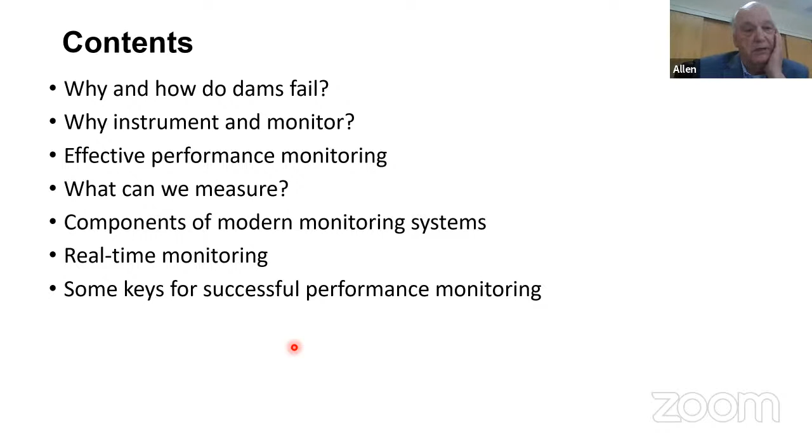Historically, with a lot of water-type dams, we tended to drift into monitoring once a quarter. In my view, in today's world, that's not adequate. I'll review some keys for successful performance monitoring based on the experience of myself and my colleagues. I will skip a few slides here—I know this is going to be shared with some students, so I left a few slides in to elaborate on some topics.

So we don't have time to cover all those, so I'll skip a few as we go along. I want to start with a question: are we doing things the right way, considering that dams have failed and continue to fail? Just a few perspective statistics here.

A modern water storage dam historically is shown to have an annual failure rate of about 1 in 10,000 over its life, or half of those occur during first filling, so about 0.5 times 10 to the -4 after successful first filling. That comes from my colleague Greg Baecher and colleagues. That number has been challenged many times since 1981, but it seems to still stand up. Some work I did a couple of years ago also seems to be confirmed by others, that tailings dams have an average failure rate of about 10 times this value.

Now that's a rough number. The key point is that it is significantly higher than for modern engineered earthen dams for water storage purposes. If you simply ask what this means: considering that a dam might be expected to last on average about 100 years in today's world, then the chance an average modern dam might fail during its lifetime, if it survives first filling, becomes about 0.5%, or 1 in 200.

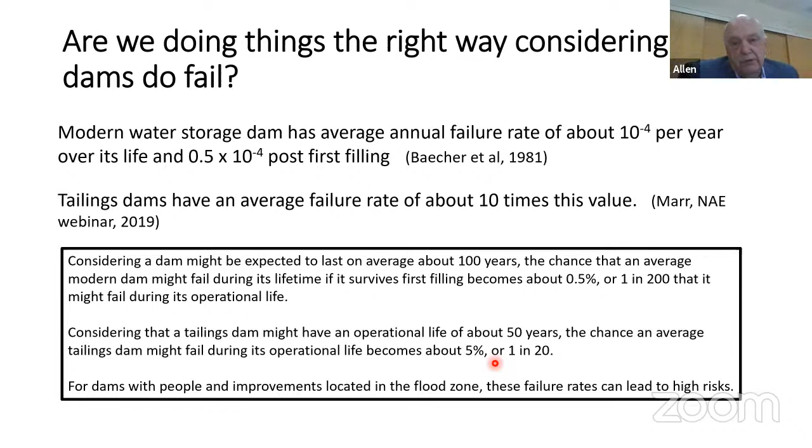Considering that a tailings dam might have an operational life of about 50 years before going into closure and hopefully a safer mode, the chance an average tailings dam might fail during its operational life becomes about 5%, or 1 in 20. When you take these probabilities and combine them with potential consequences of a failure—to people and improvements downstream—these failure rates can lead to quite high risks to society for certain dams in certain locations. A dam in a remote location with low consequences may not be as concerning to us as something above a city.

Just to review a few recent failures to see what we can get out of those.

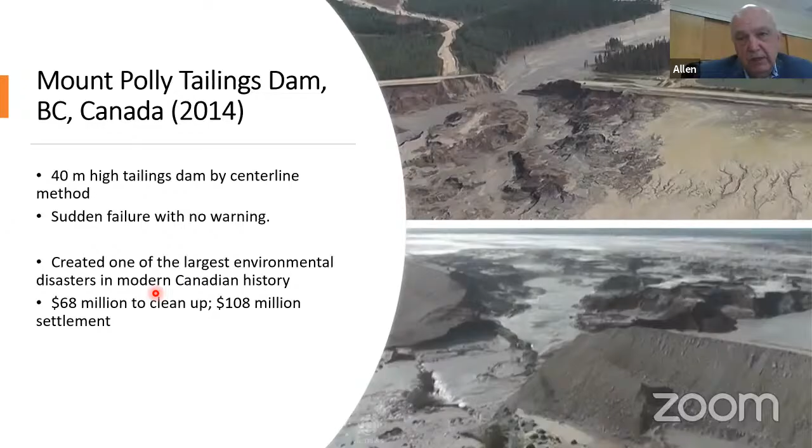There was a major failure a few years ago in Canada, a 40 meter high tailings dam built by the centerline method, a sudden failure with no warning. There was some instrumentation in this dam, but not very much. Its consequence is that it created one of the largest environmental disasters in modern Canadian history. So while this was a waste dam, which might not be considered very important, it in fact was in its consequence. It cost quite a bit of money to clean up, and there was a big lawsuit, including engineers being charged for negligence. And it changed Canadian dam safety laws to a whole new set of requirements for safety of tailings dams in Canada, which is setting the pace for the rest of the world too.

That particular case was looked at by some famous engineers, including Dr. Morgenstern, who determined that the cause of failure was a failure through a weak foundation clay that became normally consolidated under the full added height of the tailings. That brought it to normally consolidated shear strength, and as a result, by continuing to add material, it experienced an undrained failure. This failure mode was not anticipated because the engineers who designed it never anticipated it becoming normally consolidated material.

There was instrumentation. There were piezometers installed, but they were of the type unable to measure undrained pore pressures induced by shearing during the last stage of loading. A common problem we see with instrumentation - it's there, but it doesn't detect the warning signs that are really meaningful to us.

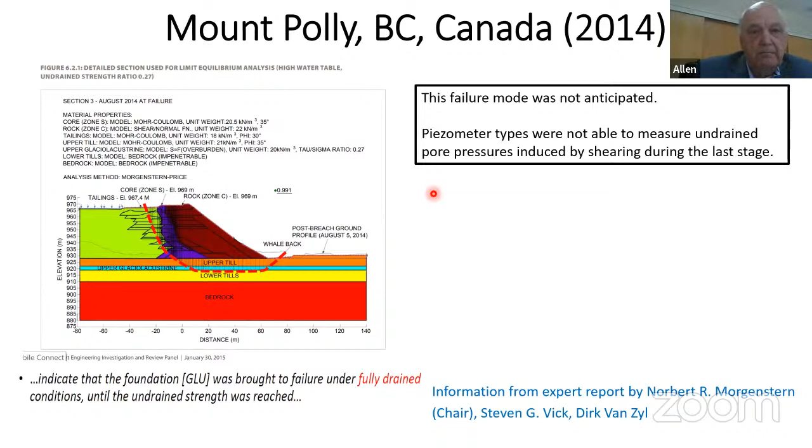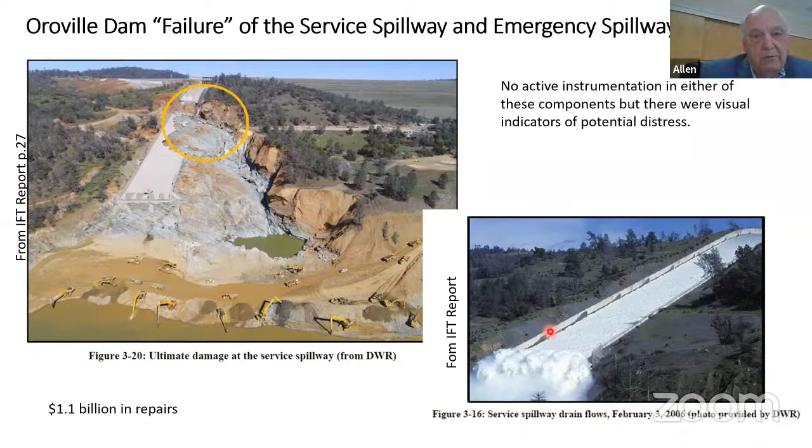There was another one, Kingston, which is a fly ash storage facility in Tennessee for one of our clients, and this was a sudden failure that was the result of an undrained shear along a previously unknown thin seam of muck - that's this zone down here across the bottom. It was basically a slimy-like material. They were filling and adding to this cell at a fairly rapid rate, and it suddenly generated an undrained failure, which then triggered a flow slide of the sluiced ash, which is a hydraulically placed material at very low density, and therefore prone to static liquefaction.

There was instrumentation, actually quite a bit of it in this facility, but none of it was designed to reveal behavior of this critical zone, since that zone was not known to exist. This could probably have been detected with real-time inclinometers had they been placed in the right place, but that required somebody to anticipate that failure mode, which had not happened.

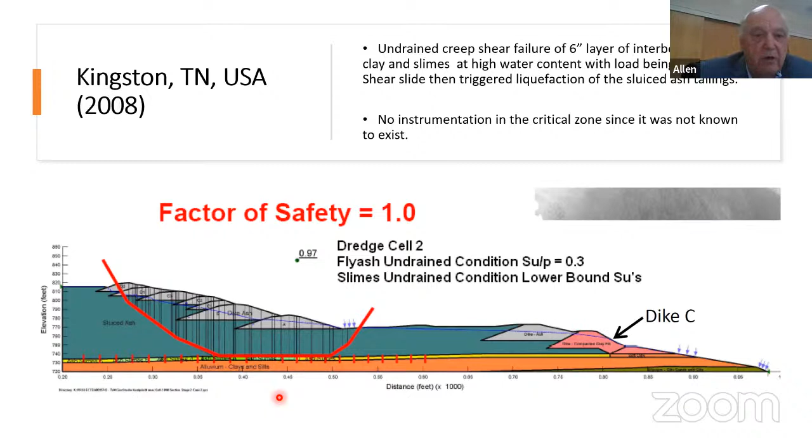My comments here are not a critique of anyone, it's just a reporting of observations and facts and what we can learn from those. Here in the United States, we had a recent failure. This is significant in that it greatly changed regulation of these types of waste storage facilities in the United States, causing our Environmental Protection Agency to get much more proactive in regulating their design. Owners today of these facilities are spending a lot of money to upgrade the safety of these facilities.

Recent failure of a water storage dam, only about 32 feet tall. There was quite a bit of damage downstream, a loss of the structure, which was part of a hydro scheme. And what's really significant about this is that the latest independent report suggests that this was a static liquefaction failure, which is very rare in an earth-filled dam used for water storage purposes. But there's no known instrumentation in this dam for performance monitoring - an interesting question of whether there should have been.

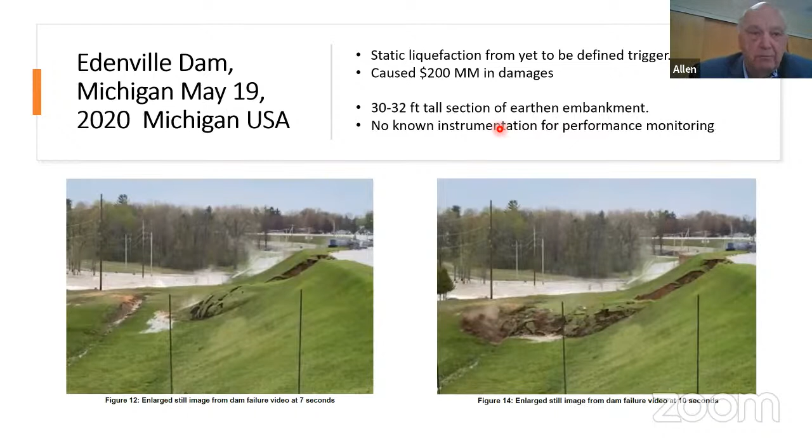Switching from these failures to show that failures occur and many times we don't pick up any information from the instrumentation because it wasn't properly designed or didn't exist in the first place, and many times isn't interpreted properly. Let's look at failures a little bit more.

Looked at from another way, that same database has been put together more from a mechanistic or driver-of-the-incident perspective. It's quite interesting to see that by far the largest cause is hydrologic flooding events, followed by seepage and internal erosion, then unknown factors and deteriorating conditions. Again, structural stability, which we worry a lot about as geotechnical engineers, is a fairly low issue here.

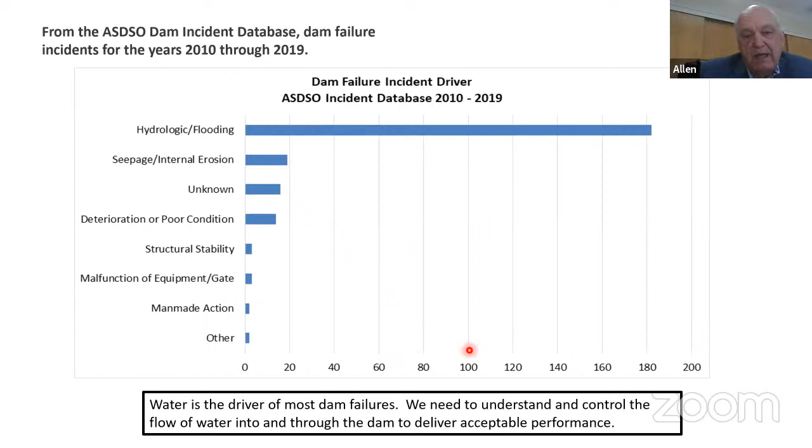We need, when we're talking about instrumentation and monitoring, to really keep these kinds of things in mind. A big message out of this is that water is really the driver of most dam failures. Now, that may seem like a stupid comment—it's obvious, it's a dam, it holds water—but it means we really need to understand and control how water gets into the dam and flows through it, and how we make it deliver acceptable performance under all imaginable conditions.

Looking for a moment at tailings dams, there's a nice paper summarizing worldwide history on causes of failure, and we see something different than what we saw in water retention dams. Here we have a lot more geotechnical type failures: seepage, foundation failure, earthquakes, and others involving geotechnical reasons as well. Overtopping is much less of an issue, and those of you who work in tailings dams will understand that—we don't have a big rainfall collection basin feeding water into our reservoir. We just don't have that driver present in most tailings dams. But this means we need to think differently about how we might instrument and monitor tailings dams compared to water retention dams, because the predominant failure mechanisms are different.

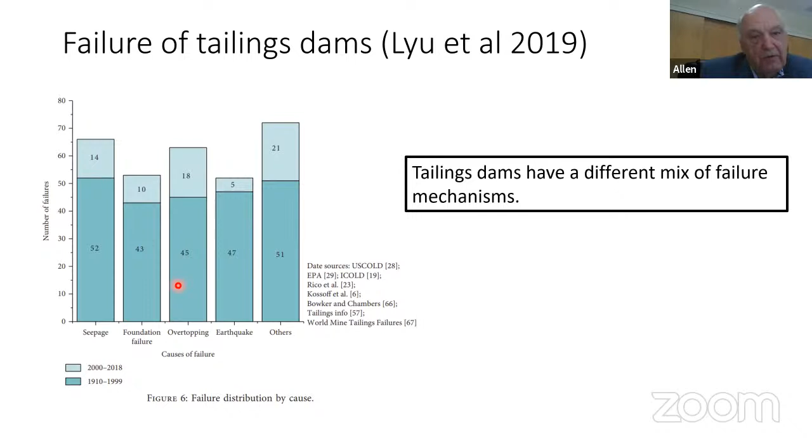So looking a bit at why we instrument and monitor dams, it really is to help us answer important questions. Some of you may know the famous early instrumentation figure John Dunnicliff, who wrote the only real book on geotechnical instrumentation and monitoring in 1993. John died recently, unfortunately, but I'd like to acknowledge his great contributions to our field. He had a statement that for instrumentation, you really need to have a question—instrumentation is to help answer important questions. If you don't have an important question, you don't need to instrument and monitor. Keep that in mind, because many people lose sight of that fundamental purpose.

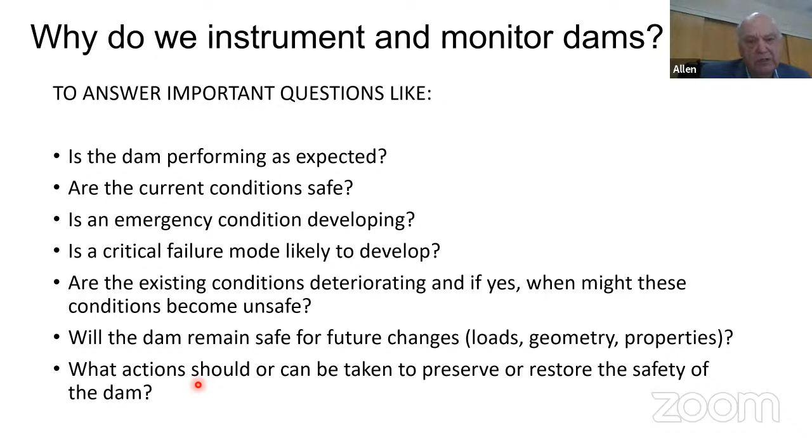So we have questions like: Is the dam performing as expected? Are the current conditions safe ones? Is an emergency condition developing? Is a critical failure mode likely to develop in the near future? These are similar questions in ways, just asked differently to get people to think outside their normal modes. Will the dam remain safe in the future? And what action should or can we take to preserve or restore the safety of the dam? These are important questions, and if we can use instrumentation to help us get substantive answers to them, then it has real value.

I want to talk a moment about failure, because traditionally we as dam engineers have tended to think of failure as loss of containment. That comes out of the water retention world, where once we started to lose containment, the dam was almost assured to completely fail and flood downstream. But in today's world, we really need to broaden that, because dams are of different types, serve different functions, and the demands of society are much more today than just simply avoiding failure. So I've added that collapse or loss of containment is a low probability but high consequence event.

But we can add increasingly a concern about resilience. Can the facility remain operational after a major storm brought on by global warming, for example? In this case, it can't be restored to perform its intended function. How can instrumentation help us on a facility that's been damaged to tell us, yes, we can reuse it, or no, we can't? It requires major rework.

And then loss of serviceability. Increasingly, it's important that our assets after an event be operational, remain operational. They've got to be able to continue to perform their intended function, or maybe they deteriorate over time to the point that they can no longer service that function and we have to take them out of operation. These are higher probability events with lower consequences, but high probability times lower consequence may still be a very significant risk, almost in similar magnitude as the above loss of containment, low probability, high consequences.

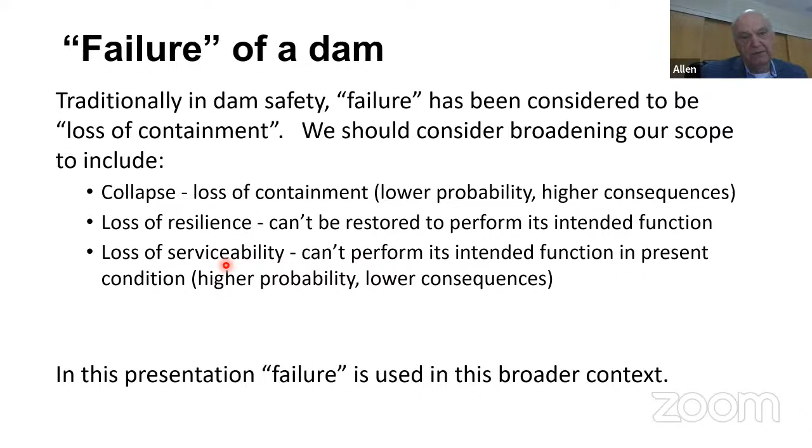So we really need to broaden our view when we're talking about monitoring a dam to help preserve safety, to help manage risk, to look at these different measures of failure to perform. I'm going to use failure in the rest of this presentation in this broader context, not only of collapse, but of loss of function. So just a few thoughts about performance monitoring.

It's done to indicate unexpected performance before the consequences become large and costly, hopefully so we can intervene and change those consequences or avoid those consequences. In order for it to work, it tells us when we implement a contingency measure to help us reduce those unexpected consequences. And it helps us spot emerging risks early so we can apply risk mitigation measures efficiently.

Increasingly, dam owners are making use of risk registers and risk assessment and risk management techniques and technologies. And I think monitoring provides some key data to enter into those risk management strategies. That's an emerging concept I've talked about for 10 years now, and it's being adopted by more and more folks. Managing risk saves money. So this really is telling us that a good instrumentation monitoring program ultimately saves an owner money through managing risk, lowering risk.

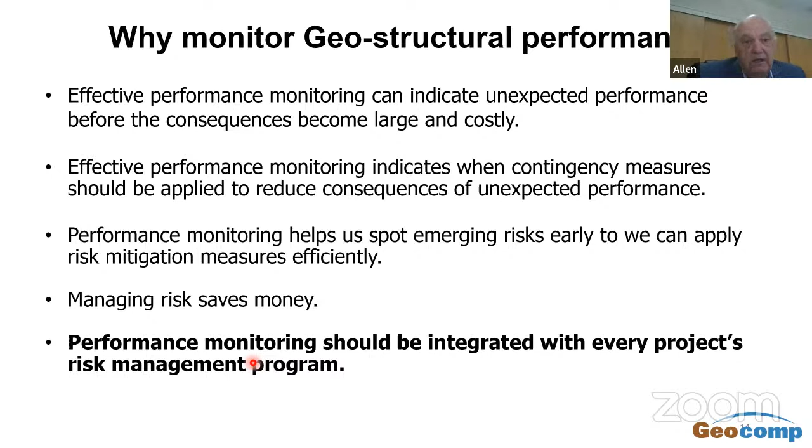And so as a result, I conclude that performance monitoring should be integrated with every project's risk management program. I don't see it done that way that often, but it really should go together with risk management.

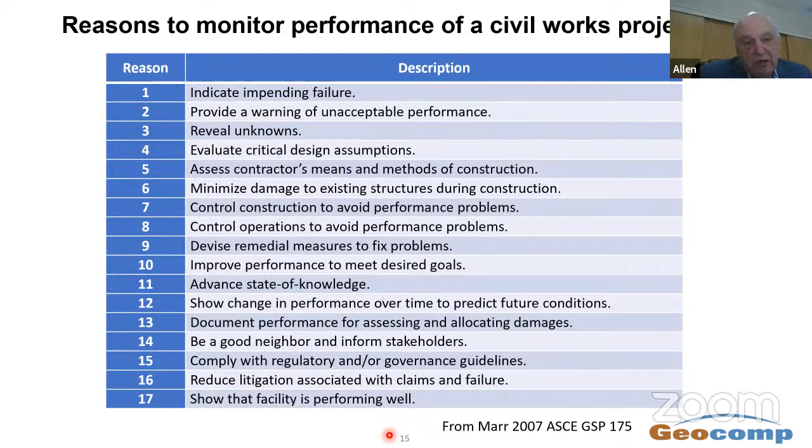There's all kinds of reasons to monitor performance of civil works. I won't go through all these. I wrote about this. If you can't get this particular publication, feel free to contact me by email. I'll be happy to send you a copy of it. But it describes these various means and reasons for why, and if we're going to go ask for a budget for instrumentation monitoring, we need to really have a good justification. That's one of the reasons I tried to write on these, to help you formulate reasons, rationale for getting approval of funds to do a good performance monitoring program.

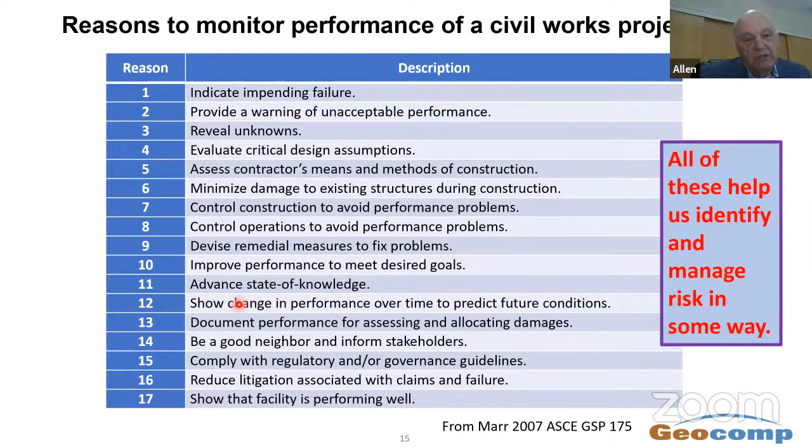These are all various reasons. I won't go through them. But if you think about them, you go back to their root, they really are all aimed at helping us identifying, managing risk in some way. And so risk and risk management is at the heart of dam safety, and it's a key driver for why we should instrument and monitor.

This is a busy slide, but I just focus on the key message of this slide. I put together, going back to this number that we had of a dam we had at the beginning of the presentation, a dam that's well engineered in the modern world has an annual probability of failure of about 0.5 times 10 to the minus 4. But how might monitoring help us lower that? Suppose we have a huge population downstream or a nuclear power plant downstream. This might be too high of a probability.

And so I worked out what's called an event tree to trace out how things might develop and how interventions might change probabilities. I won't go into these details, but the point is, if I instrument and it's successful in detecting poor performance and I implement my corrective actions properly, then I can lower, in this example, my probability of failure by roughly 10-fold. And depending on how you work with these probabilities, you can prove that a good monitoring program can reduce risk by 10 to 100 times. And that can be very, very cost effective.

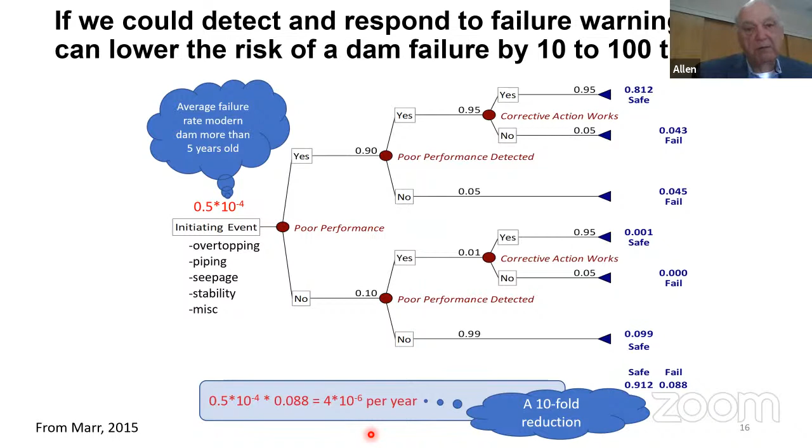I urge some of you who are challenged by how to justify spending money on instrumentation and monitoring, think of it in kind of the context of this event tree and put the numbers together to help show management that there is a good basis, good money basis, financial basis for doing good performance monitoring.

Now, I keep talking about good performance monitoring or effective performance monitoring. What do I mean by that? I mean that we've got to collect and use observations and measurements to quantify how a structure is performing its intended geostructural function. It's not just taking data and making a nice plot and a pretty color chart report. It's doing something to help understand how that structure is performing, to help answer questions like, is it meeting its design requirements? Will it continue to function?

Will there be a time when it won't function? And what can be done to improve performance?

Many times we'll go and say, well, this dam looks like it's not working right, so let's spend $10 million doing this. It's kind of like a Band-Aid thing. Well, with instruments, we can get a much better idea of why it's not performing right, so we can target that remediation work to the real root cause of the problem.

And effective, what does effective mean? It's producing a desired outcome or end result. So effective performance monitoring is really obtaining and using data and observations to help ensure the facility will perform its intended function, that other facilities are not damaged, and that impacts to the neighborhood are minimized.

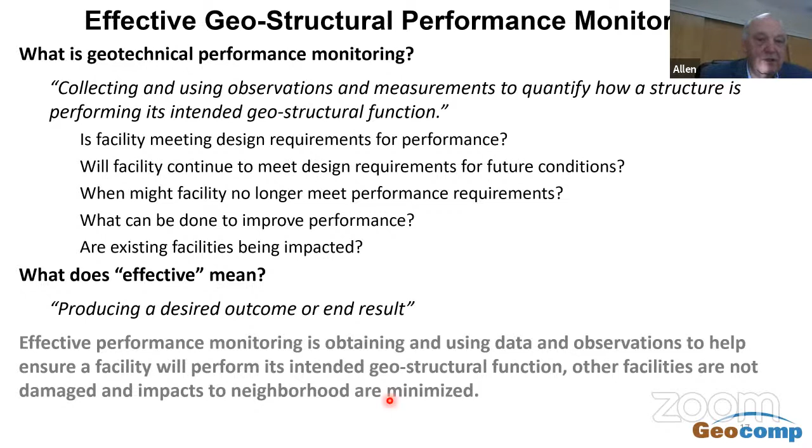I urge us to all think more broadly about the role of performance monitoring in helping not only save the facility, but preserve our people and the environment.

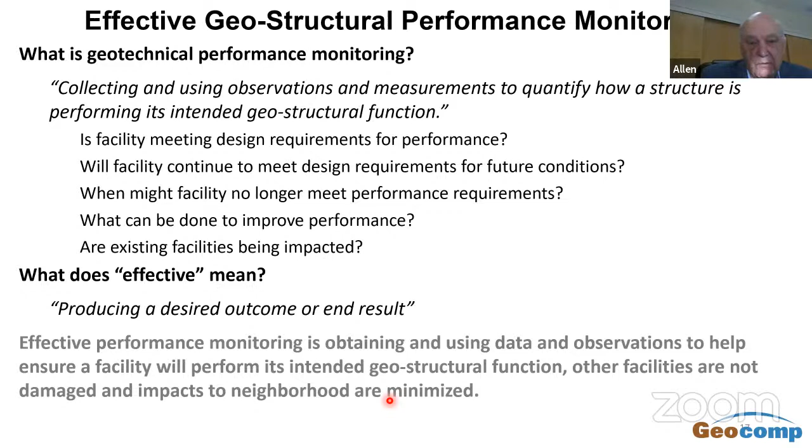So there are some challenges that come about trying to do effective performance monitoring, and I've raised some questions here. I'm sure many of you who work in this world have faced these questions - how often to read, how to get the data into a meaningful form for decision makers so that they can believe it and act on it.

How to sort out what are warning signals and what actions to take. You get a new high reading - is it a warning indicator or is it an outlier? These are all very challenging questions, but if you've got a good team together, they can usually address or develop strategies to address these questions.

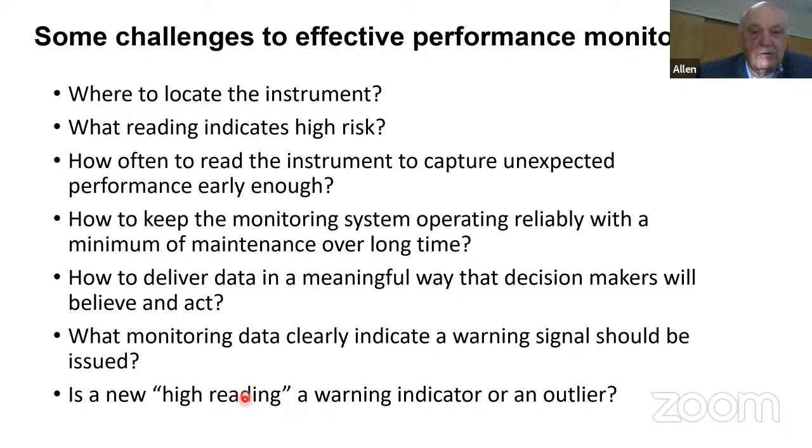Just to pick on a couple of these in more detail - the question of what and where to monitor. I'd urge us to think a little differently than in the past, where we had a tendency to take a cross section and start putting a bunch of symbols on the page. I think we need to back up and think more about what are the potential failure modes.

Those of you involved in dam safety assessments these days know that we have moved towards potential failure modes assessments. That's a good starting point for you to then say, okay, for this potential failure mode, what instrument can I put where to tell me that this potential failure mode is developing and evolving?

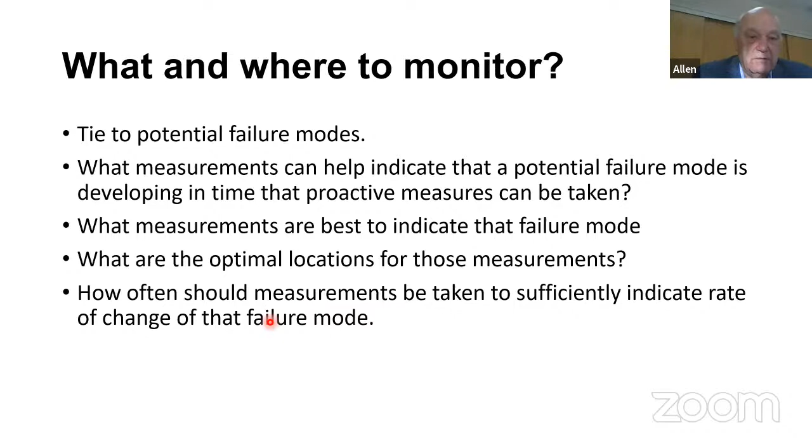It really helps you focus your efforts and point things to what's meaningful and important. It can also help show us where the optimal locations for those measurements are, and maybe indicate how often the measurement should be made in order for us to be able to pick up the rate of change for that particular failure mode.

So with failure modes, we need to think more broadly about this too. Sorry, I just want to reset my clock here so I don't run over. We tend to sometimes focus, as geotechnical engineers, just on stability of the downstream slope.

And so we'll put in deformation monitoring systems, maybe a few piezometers, and that's it. But we really need to think much more broadly - there are many components to a dam.

The Oroville Dam, for example, which I showed earlier, is an embankment dam - a major embankment dam. The embankment never had a problem when it failed. It was the spillway, the main spillway and the auxiliary spillway that gave problems.

We've had other cases where gates failed and created real issues. So we have to think, if we're instrumentation monitoring people, much more broadly to the whole spectrum of parts of the dam that might contribute to my broader definition of failure.

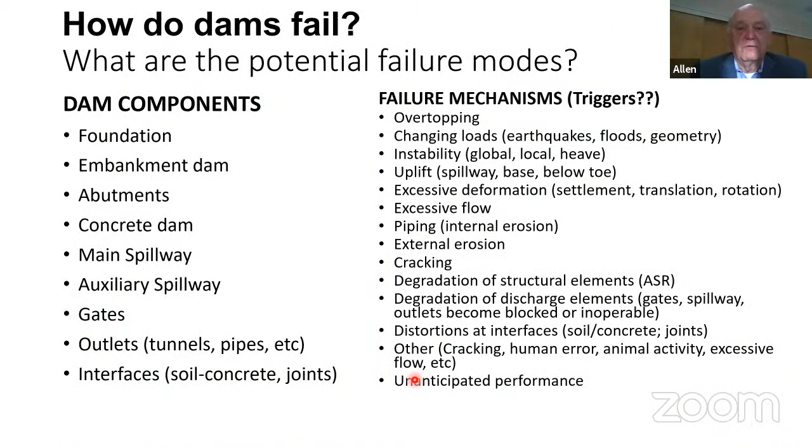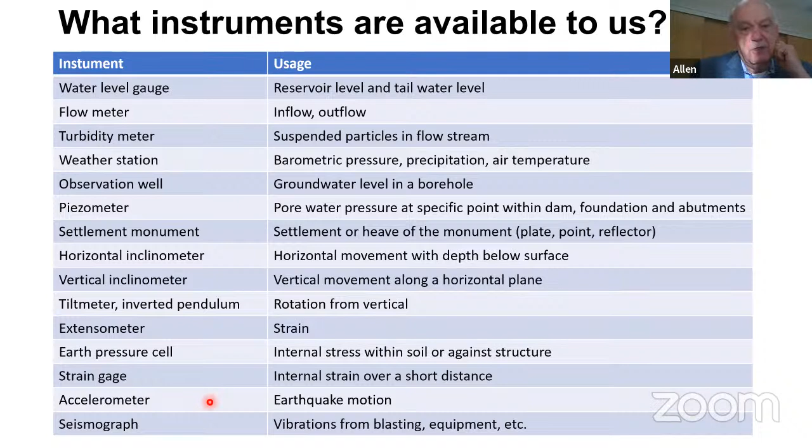So that's a starting point of what we might instrument, and how we might do it. There are lots of instruments available to us today, too many sometimes, all kinds of different gadgets, and it's easy to get lost in all of that. But it's worth recognizing that for about anything we want to measure, there's a sensor to do it. I won't cover all of these, but I'll share this presentation with Professor Roja and he can distribute it. You can see we can measure lots of things, and there's some newer technologies too that are becoming available that are very exciting for more global monitoring.

These are all more or less point sensors. These get into more global monitoring capabilities. For example, LiDAR allows us to fix an instrument away from the dam and scan the entire outer downstream face every half hour if we want to. That's really pretty interesting, and it can detect XYZ movements down to a few millimeters. LiDAR aerial, where you're doing it from a drone or an airplane, produces a point cloud, and you do that repetitively, look at the differences, and calculate vertical and horizontal movements. Again, a very interesting technology, the cost of which has come way down.

Radar is being used somewhat like LiDAR, but at a different frequency, scanning the surface to detect movement. This was actually used, or is being used, on Brumadinho. It's being used a lot in mining in Australia, but it's still working its way into the dam world.

It's still quite expensive. InSAR is another very interesting technology using satellites to detect movement, moisture, and other surface conditions, again to a few millimeters of accuracy in Y and Z directions. It's very complicated data processing, but it's getting better, and this is becoming more of a service available to us, just to buy the images, the maps, and the point clouds.

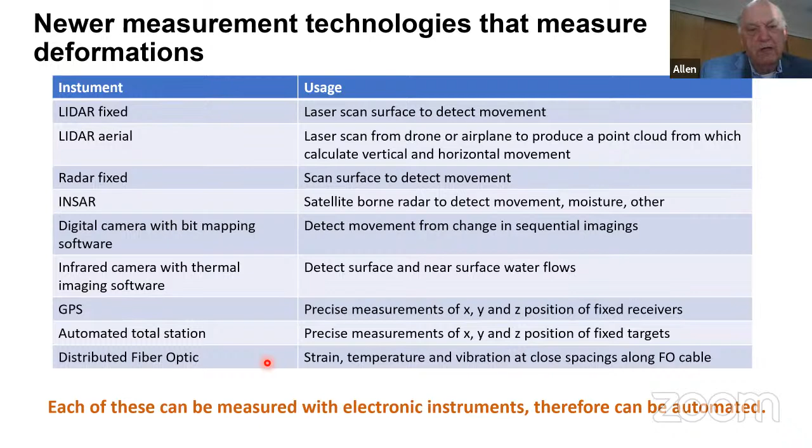So each of these can be measured with electronic instruments, and therefore we can automate with them. A couple of examples of what an automated system looks like, and I just use these as some indication.

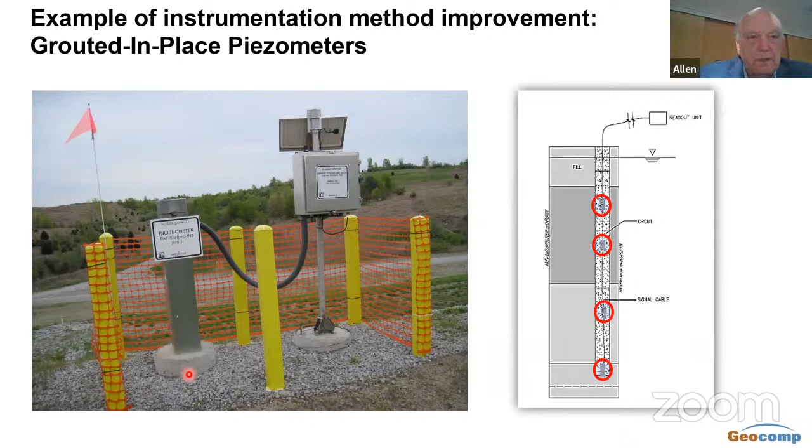One I really want to focus on is the grouted in-place piezometer, where we put multiple piezometers down the same boring and grout them in place. People say this won't work because grouting will keep the water from flowing, but we don't need water to flow, we need pressure to transmit. So as long as it's saturated, these work very well.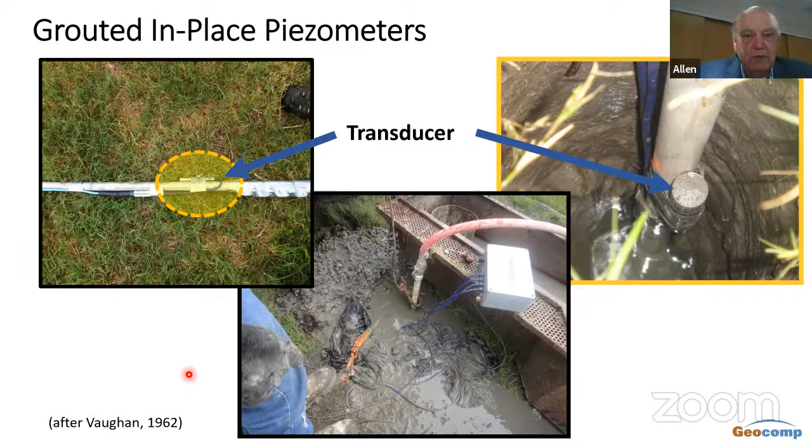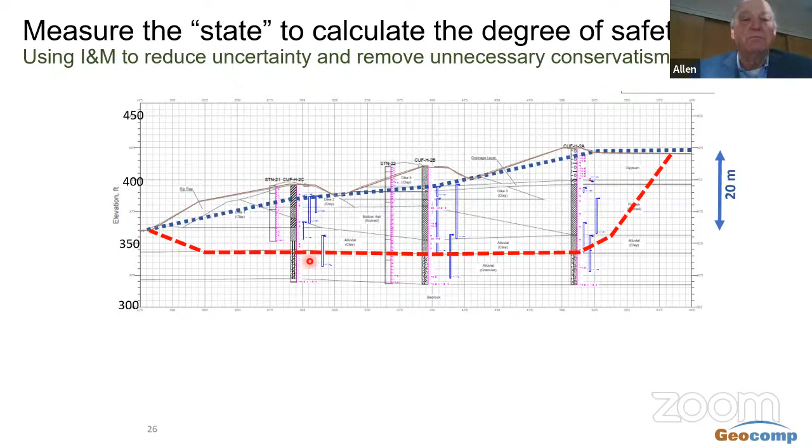I hope you can see the actual measured pore pressures were a third to a half of what was being used based on the assumption of this phreatic surface. That simple change - measurements done with multiple piezometers grouted into a single borehole, or two or three boreholes - that change in how we do things and interpret them led to factors of safety going from 1.2 to 1.5. So the dam went from essentially an unsafe condition to a safe condition simply on the basis of better information on pore pressure.

This saved this client tens of millions of dollars in avoided remediation and repair costs, because there were several facilities that were like this.

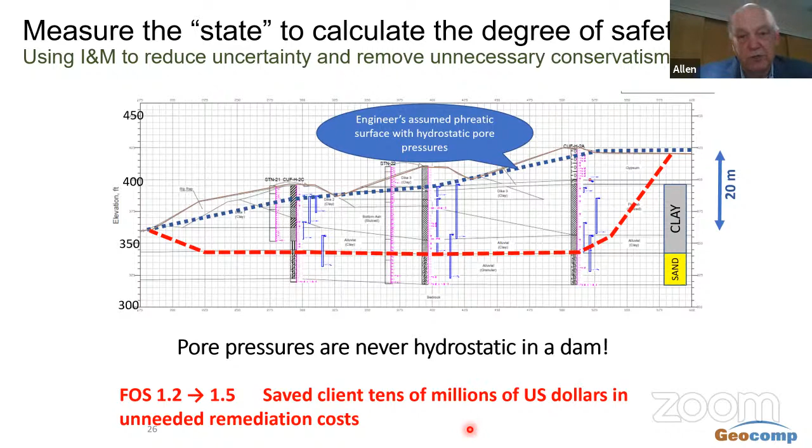These technologies - the other beautiful thing is many of them can apply anywhere. This is a dam in Brazil. My Portuguese isn't good, so I won't try to say this, but Professor Roja and some of his students and I are doing some work on this dam.

Here's Professor Roja out doing the old classical take-a-picture thing, but his student uses new technology - this is a drone that allows us, after we walked along the top of it, to fly within half an hour over all the contact areas with the abutments, letting us see the entire downstream face of this dam and record it for future purposes. A really major step forward. I suspect every dam owner and their safety program will be flying drones in the very near future.

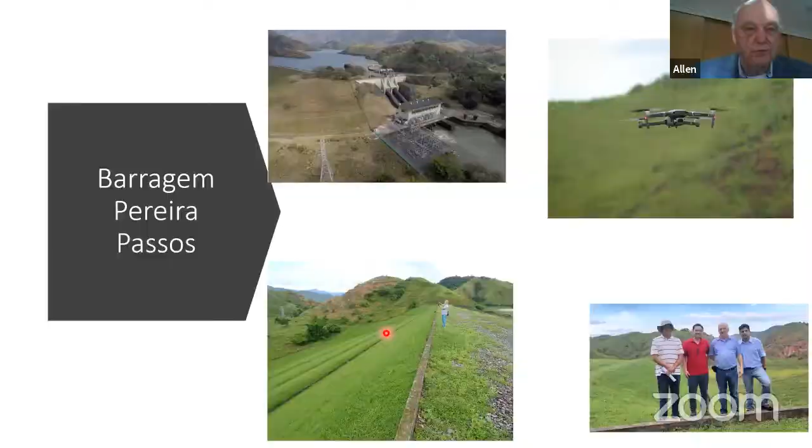Other types of instruments include electronic liquid levels, so we can track what the reservoir is doing. Notice one thing I want to show here is the extra effort being done to protect these instruments. Many times people take a shortcut on this, don't put those in, then the instrument gets damaged and doesn't work very well.

We also now include weather stations a lot of times on sites, because we're getting local weather that's different than what a station ten miles away might say. These are fairly cheap, inexpensive, and add a lot to our ability to interpret data.

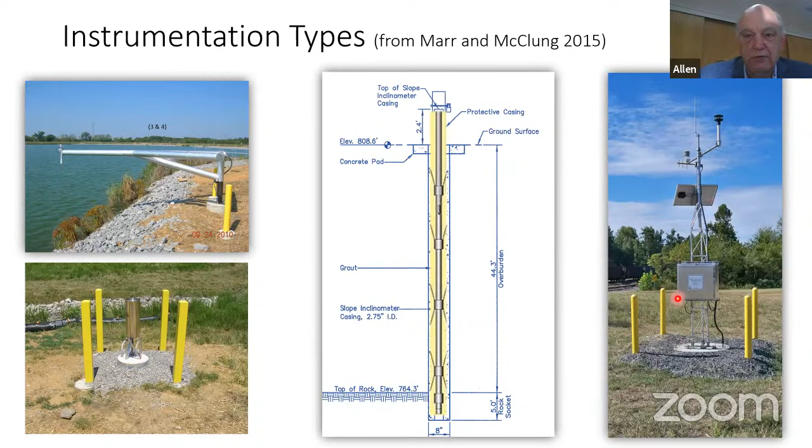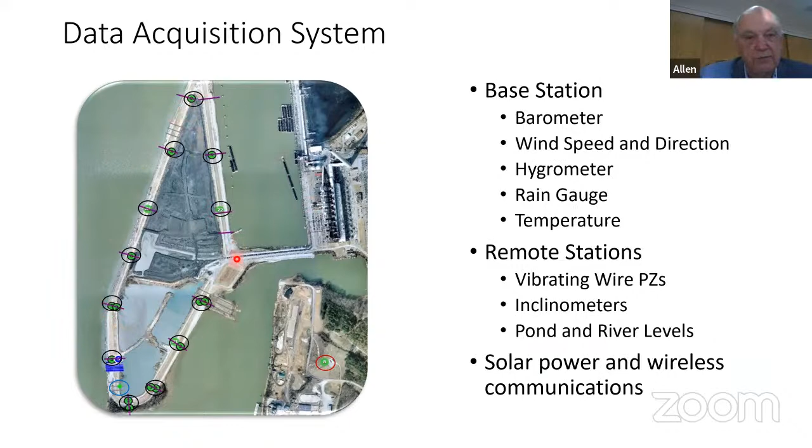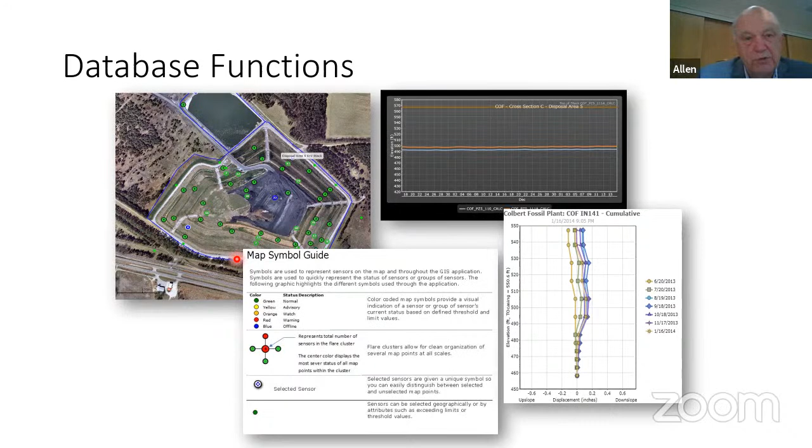This again is solar powered, going into a remote telemetry station. Data acquisition systems gather all this stuff on a widely dispersed site, aggregate it into a modem, and send it off to a central database collection system - now usually done on the cloud - giving us very nice reports telling us in real time what our instruments are telling us.

We combine that with GIS mapping so we can track what changes are happening in geometry with time. This can be very useful on surface dams, so we can keep track of the history of construction along with what the measurements tell us.

Technology can do wonderful things for us. We just have to be willing and daring to put it to work, and put the right people in the room to make sure it does work for us.

Another new application we've been asked recently to get involved in is upgrading emergency warning systems using some of these later technologies. The idea is that we might not detect failure early enough, but if we can get just an hour of warning that something terrible is happening, we can get people out of the way. These technologies need to be thought about more in terms of how they fit into a good emergency warning system to help save lives.

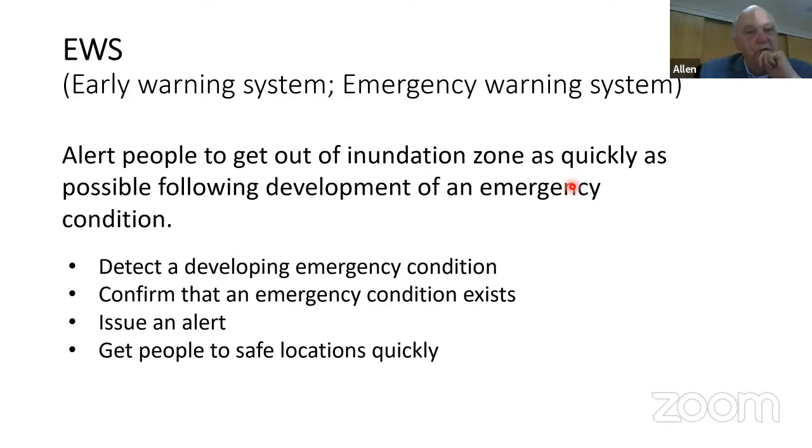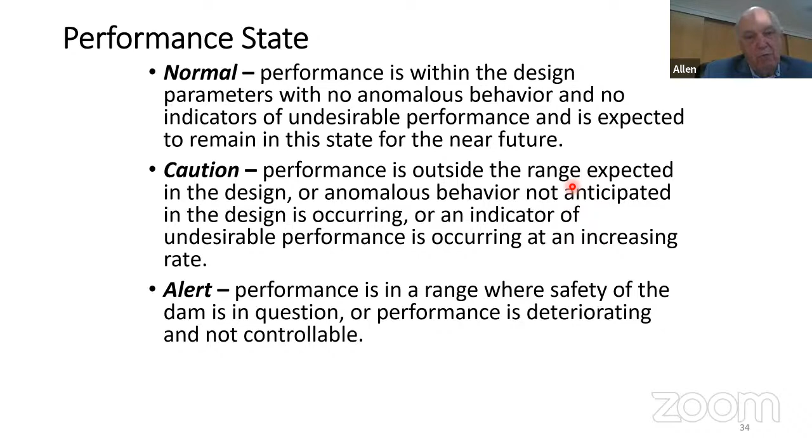As part of all this, you've got to be prepared to act quickly. We talk about performance states as normal, caution, alert - normal being green, caution being yellow, alert being red. I've defined these a bit more carefully, going into detail about what might be used to establish a threshold level and a limit level, and what actions you might take.

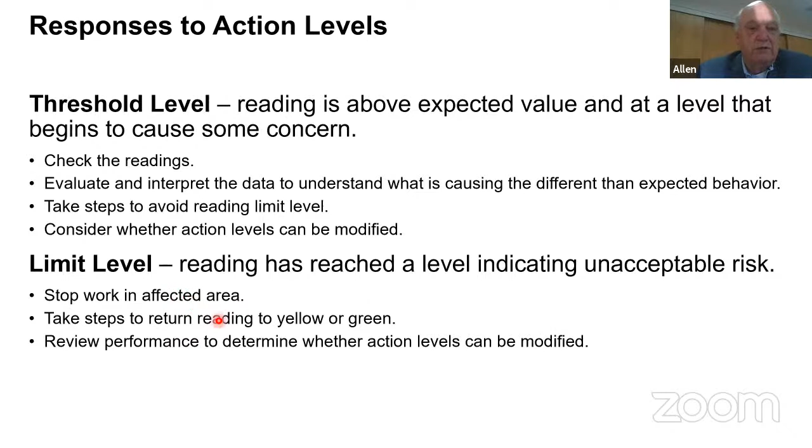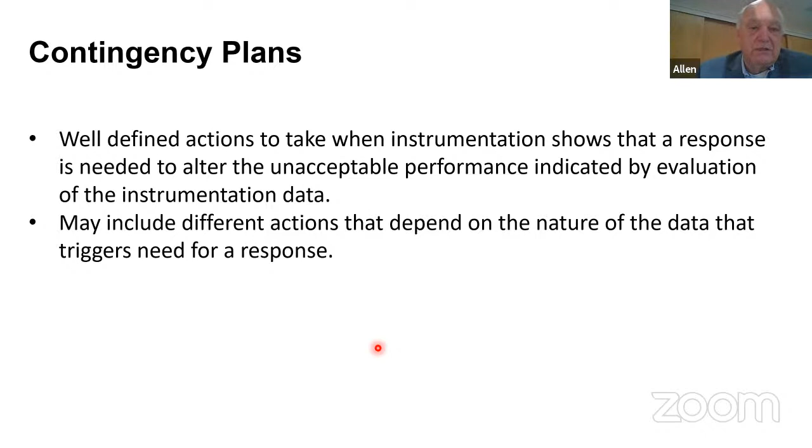At limit levels, you stop work and undertake some protective measures. You enter into contingency planning, but you don't do the planning then - you've already got the plan thought out ahead of time, and you implement it. That's a really important part. In many cases, people don't develop that ahead of time, so when the red warning comes, they don't know what to do. A bunch of meetings occur and you can't get agreement - that's too late. You need a written contingency plan that's clear, unambiguous, and lays out when you have to do what.

Data and information are coming with these systems - a lot of it, and we can get overwhelmed quickly. Geocomp collects data on like 50,000 sensors a day, some as often as 100 times a second, believe it or not, in some of our bridges. That data and information has got to be processed.

Data quantifies performance, but by itself it's not enough. We need information, context information, to give us situational awareness - things like documents, cameras, video, visual reports. All that needs to be combined together so that the data and information is up to date, on time, and accurately describing the performance state. It's got to get to decision makers in a form they understand, and they have to be prepared to take prompt action when required.

Some of the examples I showed had very little warning that a major failure occurred with big consequences. These are just things I've put together over the years showing what these different action states mean and what your response at each might be. These need to be laid out clearly for a project so everybody understands their role and what they need to be doing when an instrument goes yellow or red.

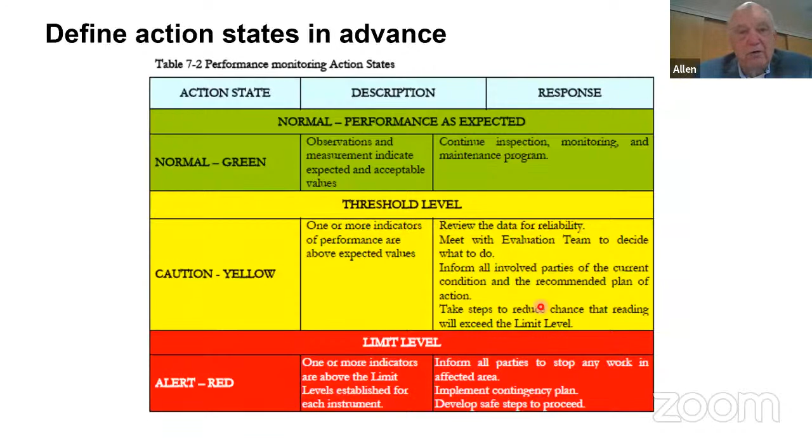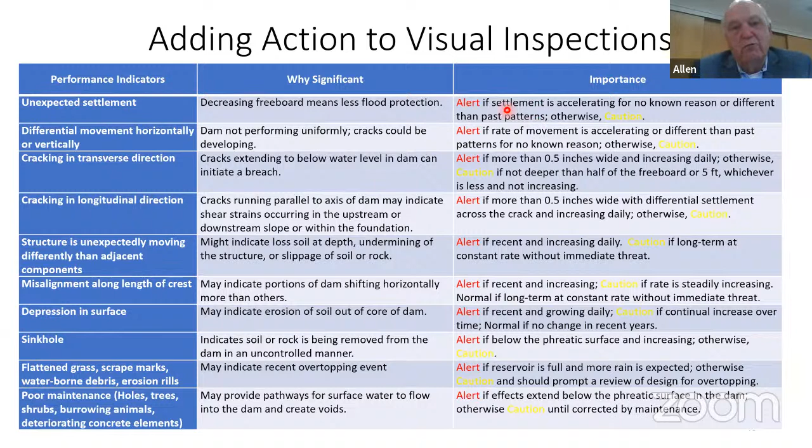Let me skip over that part. I want to emphasize visual monitoring remains very important to all of this - we can't put an instrument everywhere. We do see people do visual inspections, but what's missing is an action plan: if you see certain things, what does that mean you must do? You need to work through those, and I'll give an example of how you might do that.

So why monitor in real time? Because failure can occur rapidly with very little visible warning, even for a dam that has functioned well for many years. The examples I gave had very little visual warning at the beginning, yet the consequences were quite significant. Failure may be avoided using preventative, pre-planned actions if we have adequate warning. At the very least, we can get people out of the way, which can considerably reduce the consequences.

With real-time monitoring, we're better able to connect cause and effect - we can understand better why things aren't behaving as expected. I'll quote a paper from leading colleagues here in the US who work for the Federal Energy Regulatory Commission, our main dam safety regulator: results of a dam safety surveillance and monitoring program should be evaluated on as near a real-time basis as practical. Today, with automated systems, that's within seconds to get the data to you, then a few minutes to evaluate it and make a decision. That's what the state of practice can bring us. Keep that in mind, please.

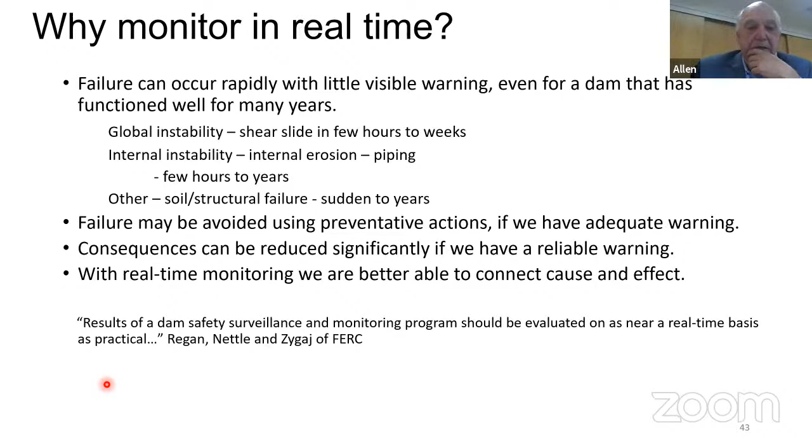So there are a lot of benefits to doing this quickly, and I've already mentioned a couple of these. I just want to make a couple of key points.

Data by itself is not enough. We need the contextual information. We've got to do something called evaluate and interpret, and that gets us to actionable knowledge for making informed decision-making, from which we take action. This evaluation and interpretation is really important.

You need to separate them. Different people mix this up. Evaluate means: do the data make sense? Can I get rid of all the nonsense? Can I pass along an evaluated set of data that are clean and believable, so that when it gets turned over to the engineers for interpretation, they don't have to ask, can I believe this data? They ask, what do I need to be doing?

So we want to have a system that helps separate these out and do these actions very reliably. These can take a lot of time of well-trained people, but if you don't make that investment, you're not going to succeed. Systems help us do this.

New modern web-based monitoring systems help us bring all this data and information from different sources automatically into a central management system where it's available 24/7. Deliver it out to your phone, your laptop, your desktop, any of your devices working across different platforms. So your phones could be Apple, your laptops could be Microsoft Windows, etc. And getting it out to all the project party members.

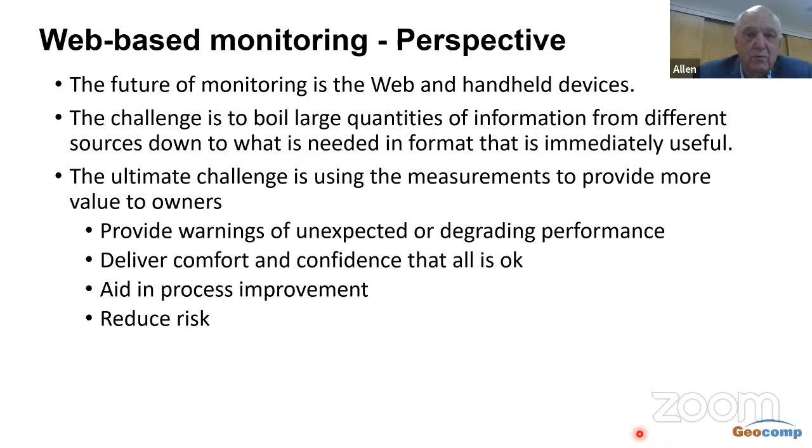So this is the future. The web-based monitoring is where it's at. The price of these data warehouses is very cheap now and very secure. We'll see that coming more and more, and it's going to help us do our job much better.

I've listed key elements of an effective performance monitoring program. There are a lot of them here. Pay attention to these. We don't have time to go through all these, but you really need to work through each of these and at least make a conscious decision of, yeah, I've got that covered, or no, I don't.

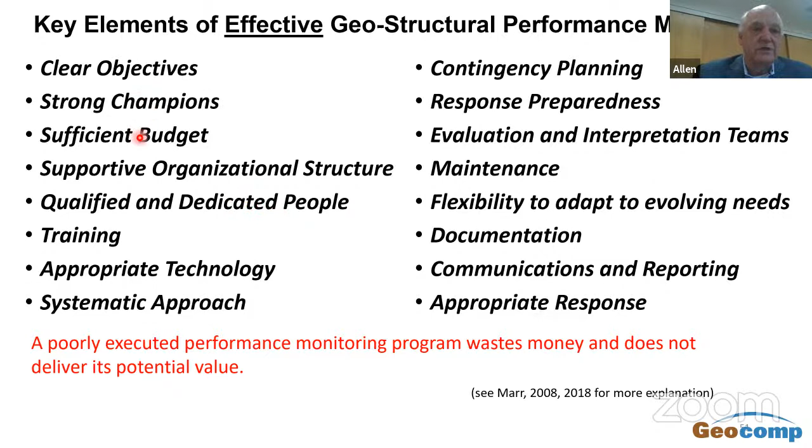Key parts I want to point out: most instrumentation monitoring programs need a champion to be successful. You need somebody to understand why we're doing this and what's the value and benefit, so they can argue to get the money to do it and to maintain it and keep it going. Without that, it will die. And you can't always do these things on the cheap and have them be effective.

We hear a lot that people say, well, I don't want to do instrumentation monitoring because it never works. That's just not true. It doesn't work if you don't get the right people and the right team on board. But if you get it, it can be almost entirely successful. We have projects over and over where we end up with well over 90% of all our instruments functioning a year later.

But you've got to follow good technique, good practices to make that happen. You collect the data, define what to do with it, and then take action. And that taking action, you've got to know what to do, you've got to be prepared to do it, and do it quickly. Carrying out and documenting these steps systematically is also really important.

One other key question: who should be doing this kind of work? I think it's the work of specialists. Unfortunately, we see a lot of this work put out as a low bid contract, which means it goes to the lowest cost vendor, who's going to take shortcuts and wind up with a system you have to live with for your life that is the result of a low bid contract. So they usually don't deliver best value in a long-term sense.

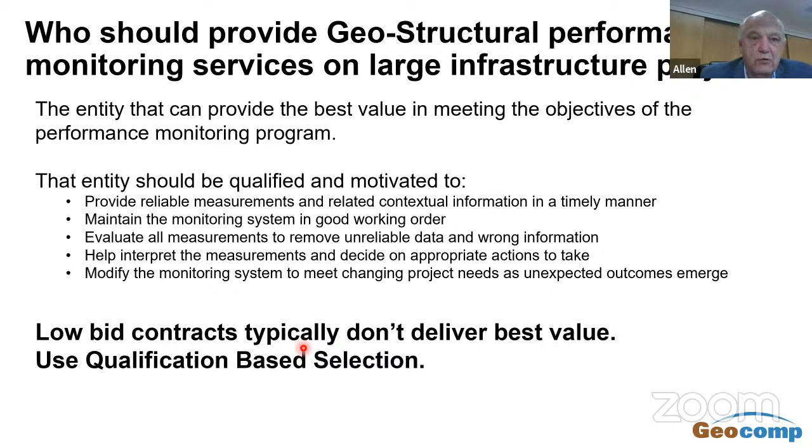I urge people to try to move towards qualifications-based selection. I've seen so many instrumentation programs involving millions of dollars that unfortunately never delivered the value they could have had they been done by qualified people.

So just a summary of some key points. Use potential failure modes analysis to help you lay out the actual locations, types, and numbers of instruments. Use a systematic approach, which I didn't get into here, but I've written about it.

Professor Dunnicliffe wrote about this step-by-step process: operate in near real time with your data and use automated messaging to communicate results across people. We do this all the time now with emails, sending graphs and messages and alert messages. It makes us much more responsive.

We need data and context information in a form that's readily understandable and interpretable, not only by technical people, but by managers. We produce reports sometimes at 8 o'clock in the morning to a project manager, and the message says in text, everything's okay. That's a great value delivered to that project manager. He doesn't have to worry about his instruments, his data, and his performance. He can worry about money.

This system should be designed to operate throughout the working life of the dam. This is a shortcoming of many instrumentation systems.

We need to have clear lines of responsibility and communication, top to bottom, with training and coordination. I didn't talk about that much, but many times we find things get detected in the field, malfunctions, poor performance, and it doesn't get communicated to a key decision maker. We need to have a champion, and the program needs to be adequately funded and staffed to be effective. It's got to be executed by qualified, dedicated people. And dedicated is really important too. Instrumentation is special. You've got to have some people who are willing to work at night and on the weekends when things demand it does that. So sometimes those people are hard to find.

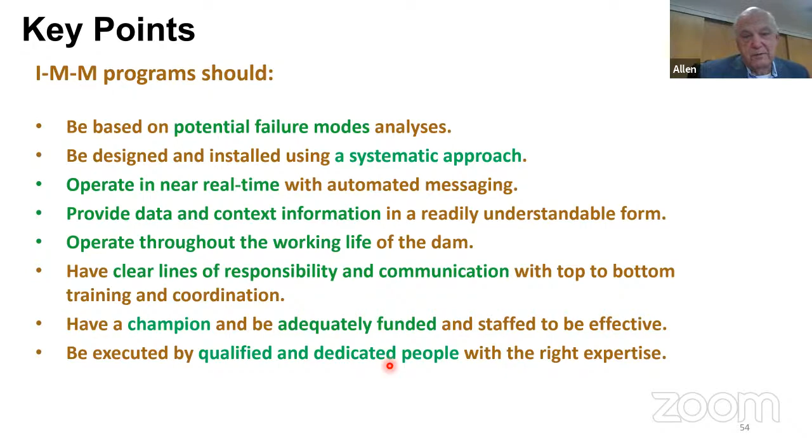So I'll stop at that point. I think that's a good ending point. And I apologize for talking so fast in a second language for you, but again, I'll share my slides.

Well, thank you very much, Dr. Marr. Oh, sorry.